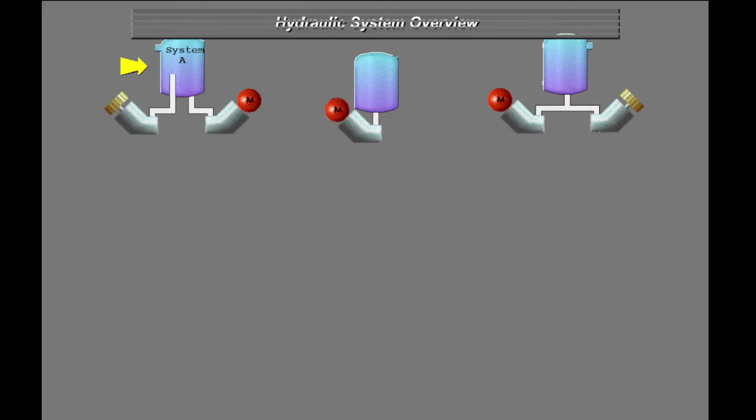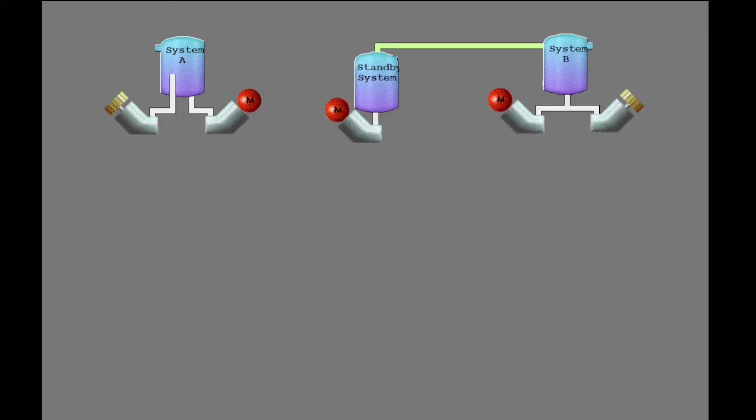The 737 has three hydraulic systems: System A, System B, and the standby system. The hydraulic systems have reservoirs in the main wheel well. System A and System B operate independently.

A hydraulic servicing line connects System B and the standby system. The bleed air system supplies air pressure to Systems A and B reservoirs to make sure there is a positive flow of fluid. System B supplies fluid for the standby system.

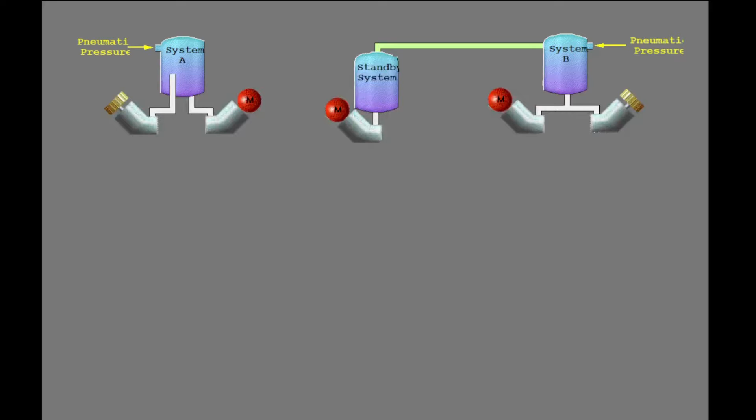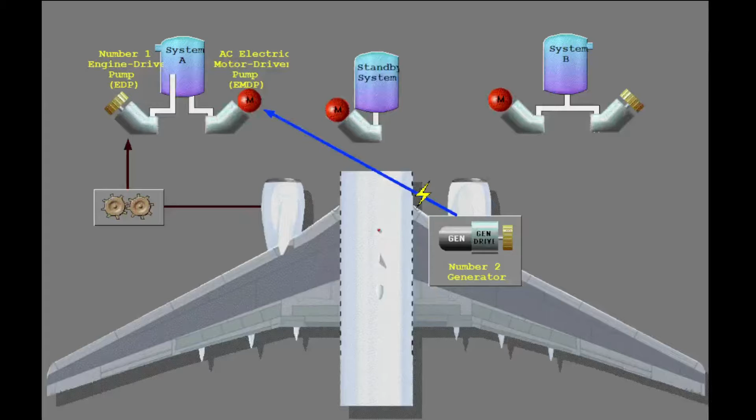The number 1 engine-driven hydraulic pump and an AC electric motor-driven pump supply the pressure for System A. Under normal conditions, the number 2 generator powers the electric motor-driven pump for System A. The number 2 engine-driven hydraulic pump and an AC electric motor-driven pump supply the pressure for System B. Under normal conditions, the number 1 generator powers the electric motor-driven pump for System B. One AC electric motor-driven pump supplies the pressure for the standby system.

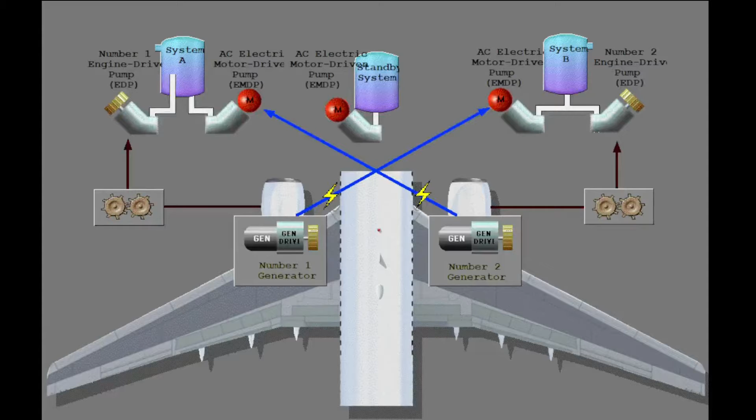System A supplies hydraulic power to these units, and System B supplies hydraulic power to these units. If Systems A and B do not operate, the standby system is available to supply hydraulic pressure to the rudder, the leading edge devices, and the thrust reversers.

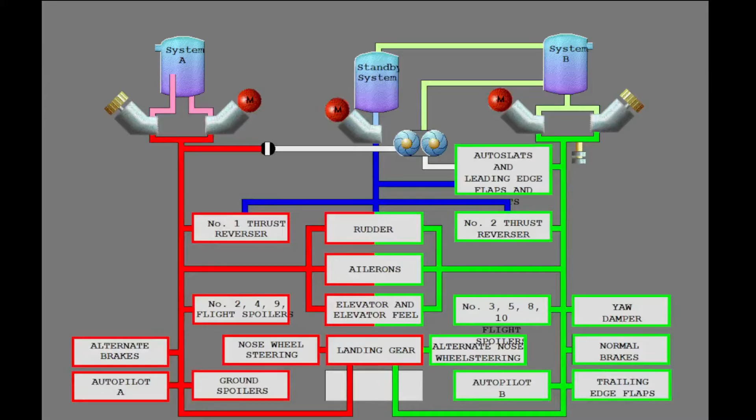The Power Transfer Unit, or PTU, supplies additional volume of hydraulic pressure to operate the auto slats and the leading edge flaps and slats at the normal rate when the pressure of the System B engine-driven pump drops below limits.

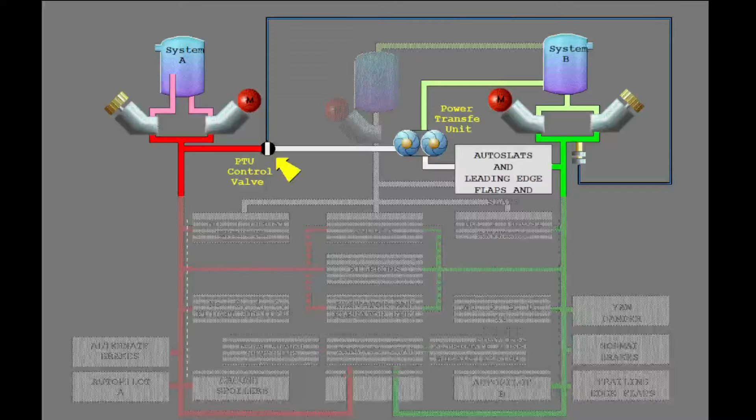The PTU control valve opens when the output pressure from the System B engine-driven pump drops below limits, the airplane is in flight, and the flaps are less than 15 but not up.

When the PTU control valve opens, System A supplies hydraulic pressure to operate the PTU. The PTU uses System B fluid to supply pressure for the auto slat system and the leading edge flaps and slats.

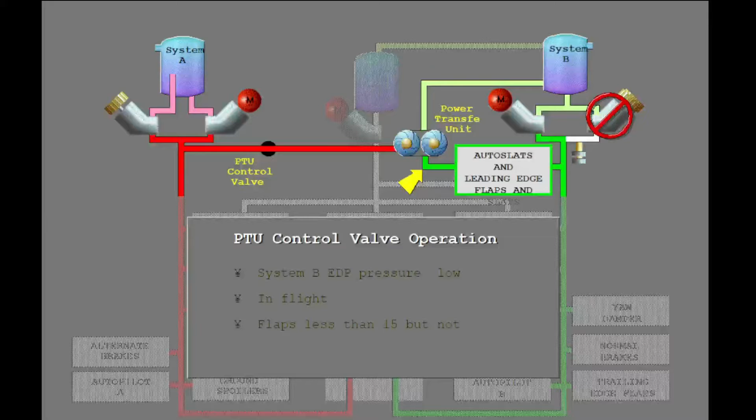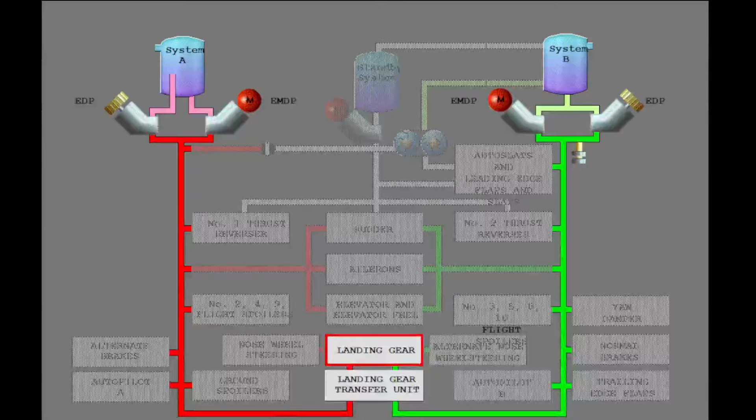If the number 1 engine fails, the landing gear transfer unit supplies hydraulic fluid volume from System B to raise the landing gear.

In System A and System B, the engine-driven pumps supply a larger volume of fluid than the electric motor-driven pumps. If the left engine fails, System A does not supply sufficient hydraulic volume to quickly retract the landing gear. The electric motor-driven pump continues to operate as usual, but the total hydraulic volume of System A is less.

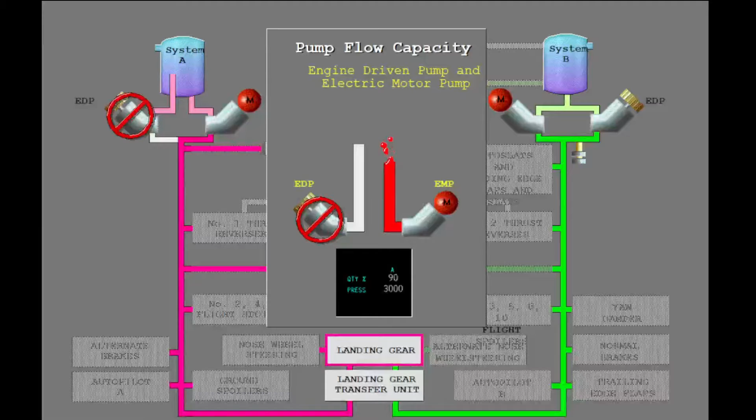The landing gear transfer unit operates when the number 1 engine N2 is less than idle, the landing gear lever is in the up position, and one of the main gear is not in the fully up position.

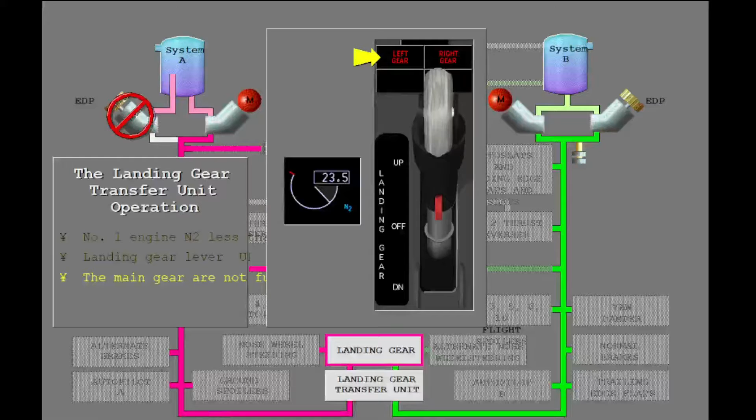The landing gear transfer unit supplies System B hydraulic fluid volume to retract the gear.

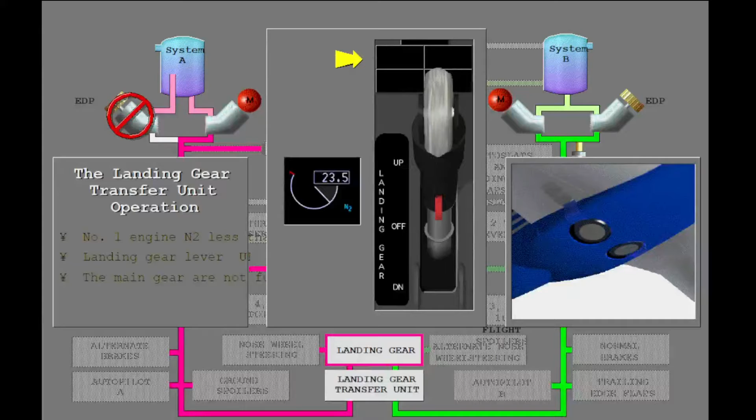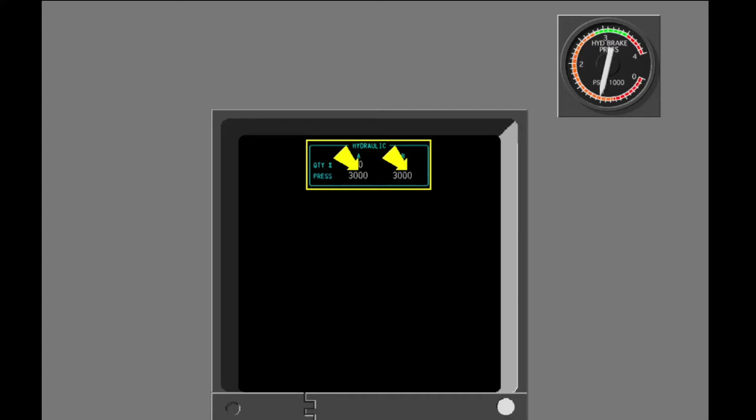The lower display unit shows the pressure of System A and System B. There is no pressure indication for the standby system. The normal pressure for the three systems is 3,000 psi. The lower display unit also shows the quantity of System A and System B hydraulic fluid in percent of full. For example, 90 shows that the reservoir is 90% full.

If the quantity is low and the airplane is on the ground, the system shows the letters RF, or refill, adjacent to the quantity indications.

The hydraulic brake pressure indicator shows the hydraulic brake pressure. The normal brake pressure is 3,000 psi.

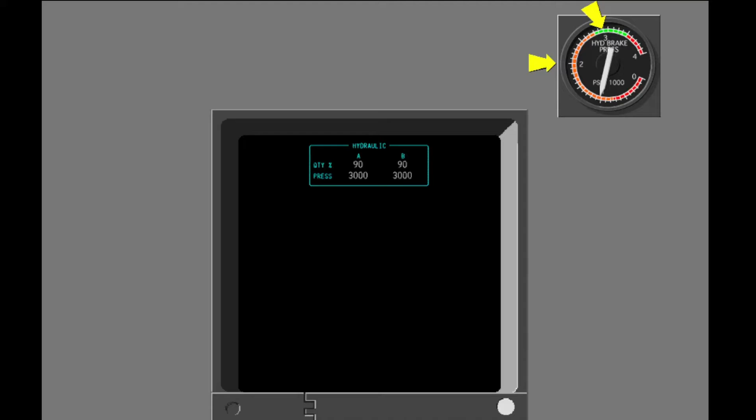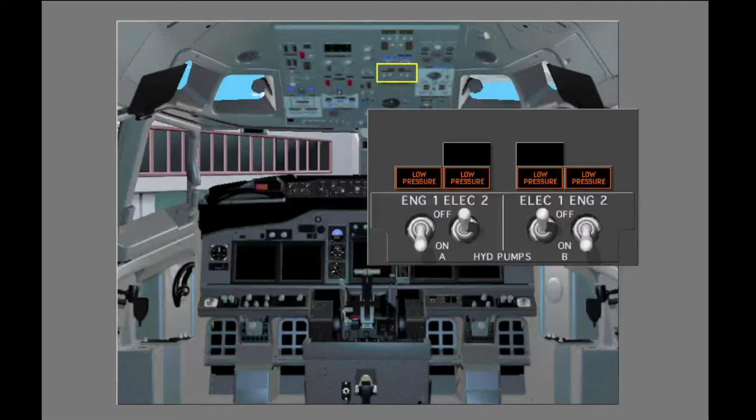The controls for the hydraulic systems are on the forward overhead panel. System A and System B controls are on the hydraulic control panel, and the standby system controls are on the flight control panel.

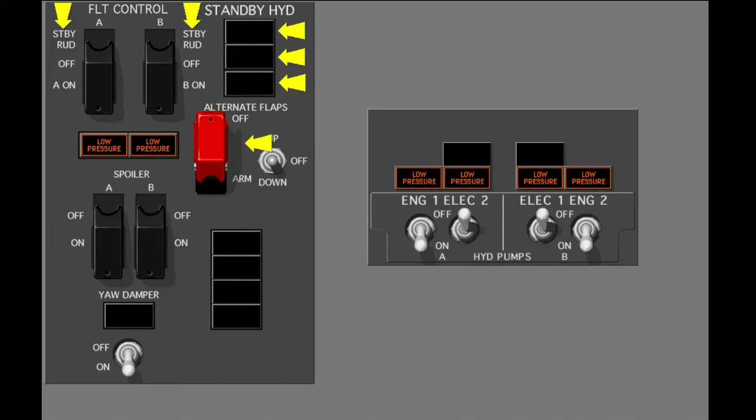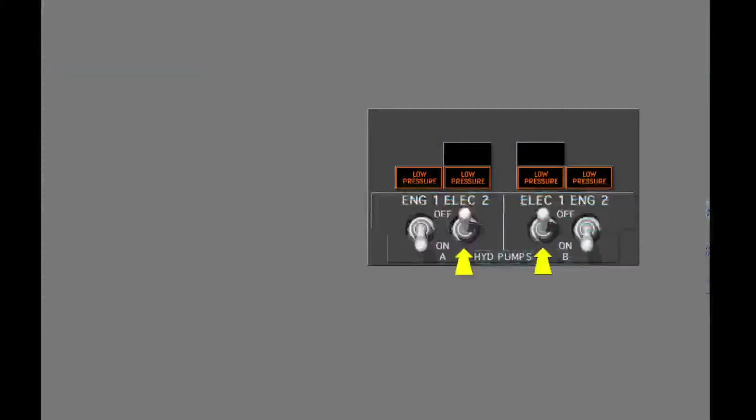Now let's discuss the normal operation of the hydraulic systems A and B. During the safety inspection, you make sure that the electric motor-driven pump switches are off before you turn on any electrical power to the airplane.

The electric motor pump switches control the electric motor-driven pumps in Systems A and B. The engine-driven pump switches control the related engine-driven pumps.

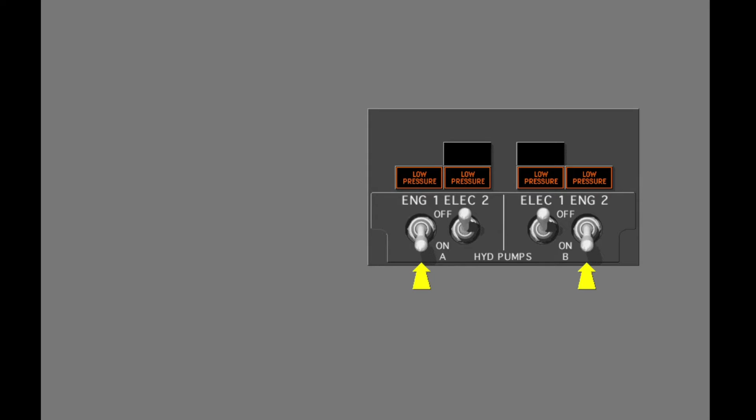Systems A and B lower the temperature of some hydraulic fluid with heat exchangers in the main fuel tanks. Before you operate the hydraulic system on the ground, you must make sure that there is fuel in the main wing tanks.

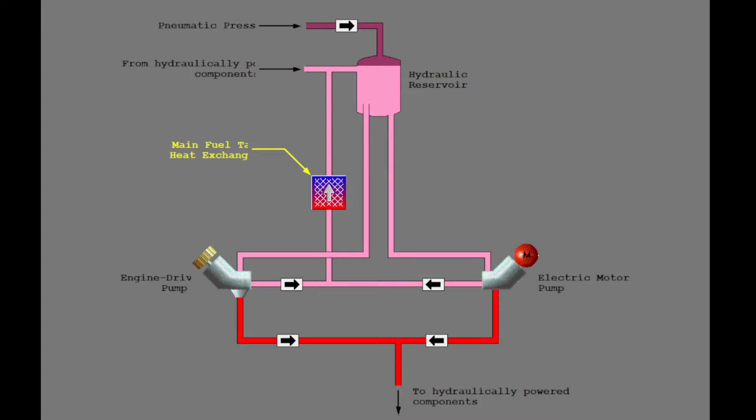The low pressure lights show that the output pressure from the related pump is low. During the pre-flight, you make sure the engine-driven pump switches are on, and you select the electric motor-driven pumps to on. Turn on the electric motor-driven pumps.

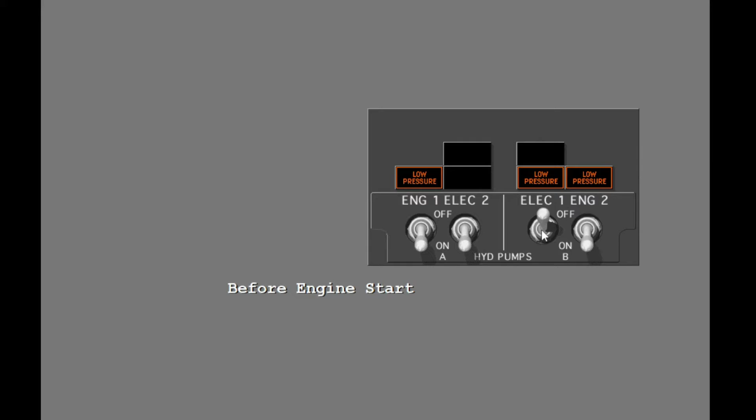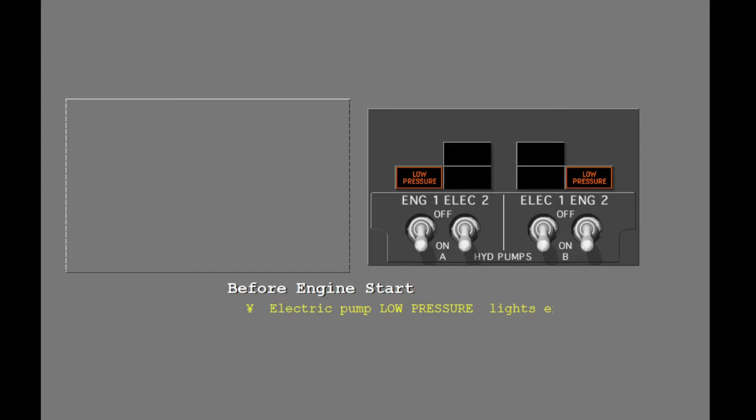After the electric motor-driven pumps are on, make sure the electric motor-driven pump low pressure lights extinguish. The hydraulic pressure increases to normal. The brake pressure indication increases to normal. And the hydraulic quantity indications do not show RF.

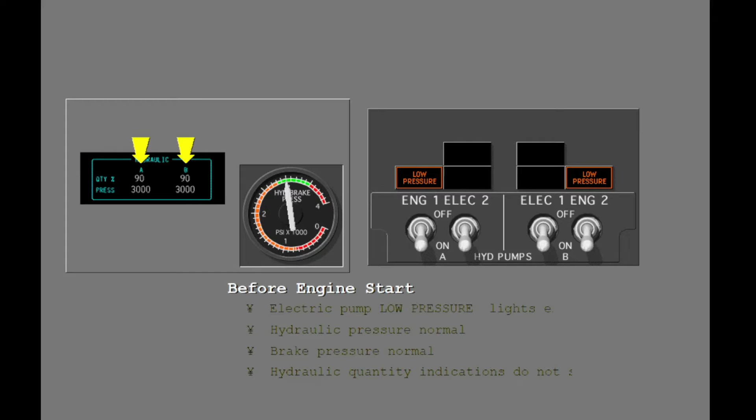During pushback, if the nose gear steering lockout pin is not installed, you must turn off the System A hydraulic pumps.

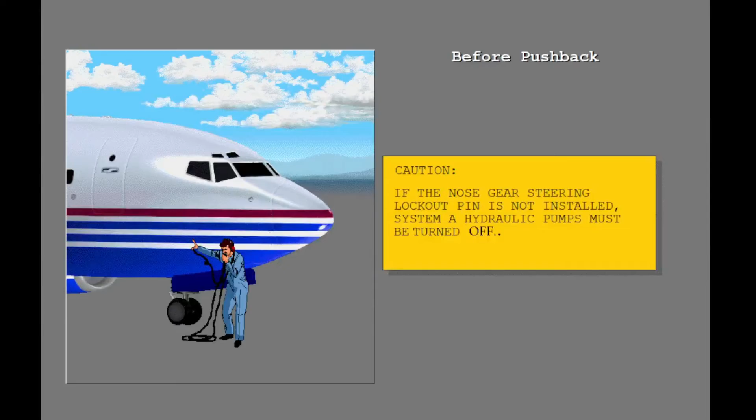The engine-driven pump low pressure lights extinguish when the engines operate and the engine-driven pumps supply pressure. Now turn off the number 1 engine-driven pump.

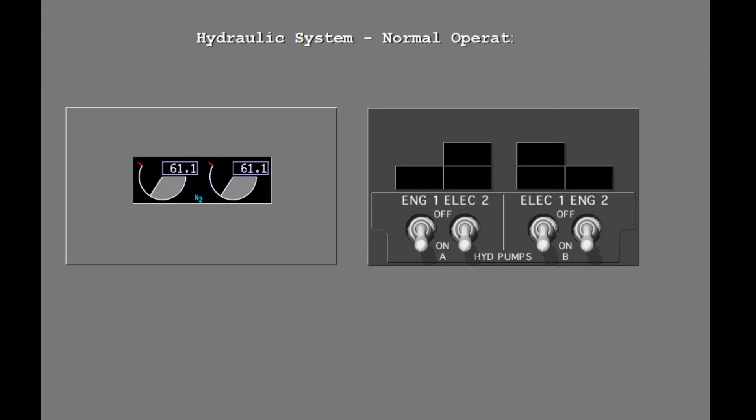When you select off with the engine-driven pump switch, a solenoid closes and holds the blocking valve, and fluid does not go through the related pump. The engine-driven pump continues to operate but does not supply pressure.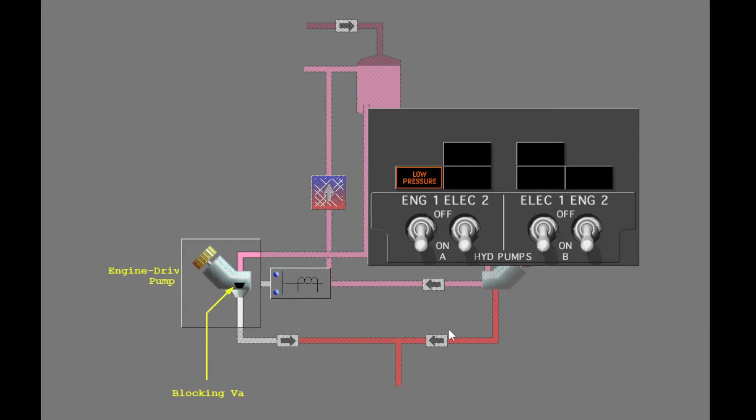During normal operations, the engine-driven pump switches stay in the on position to increase the life of the solenoid. Move the number 1 engine-driven pump switch to on. The hydraulic system is ready for flight.

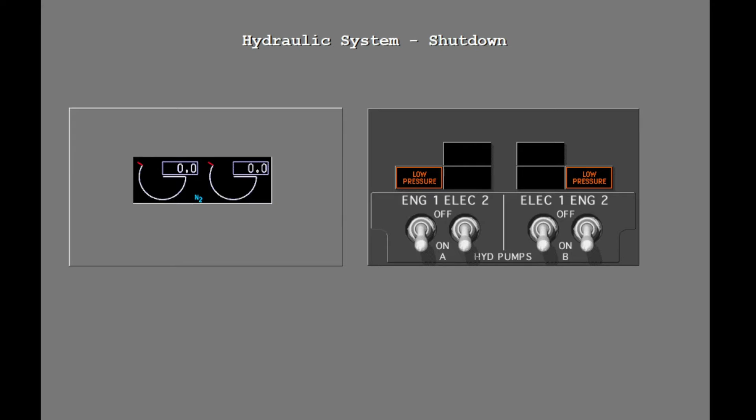To shut down the hydraulic system after taxi-in, turn off the electric hydraulic pumps. The switches for the engine-driven pumps stay in the on position.

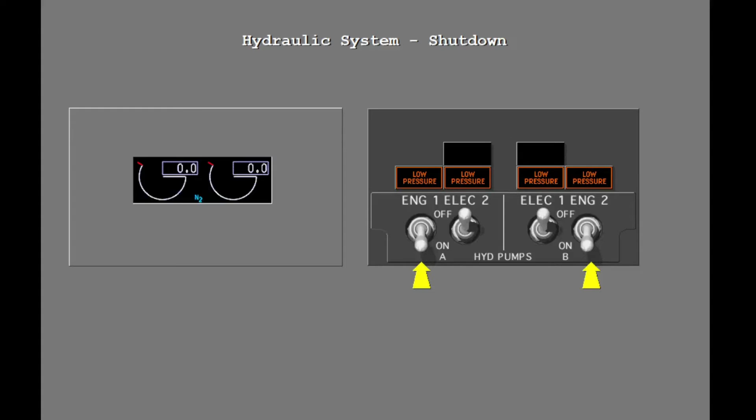To review, touch any control or pressure light. Press the green arrow to continue.

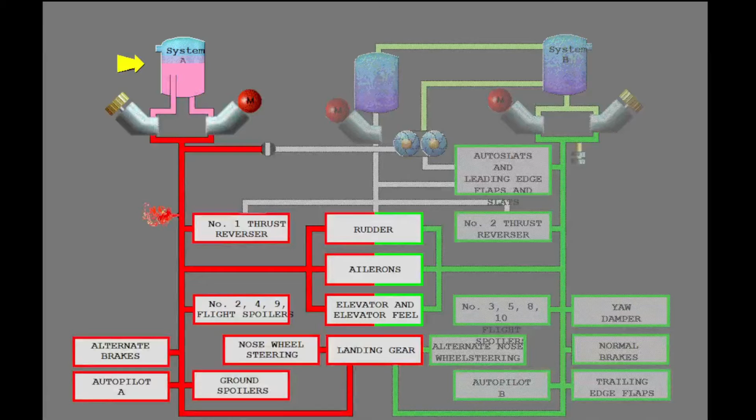During flight, there is a failure in System A and the hydraulic fluid quantity decreases. When the quantity decreases to less than limits, the master caution lights illuminate and the flight control and hydraulic annunciator lights illuminate.

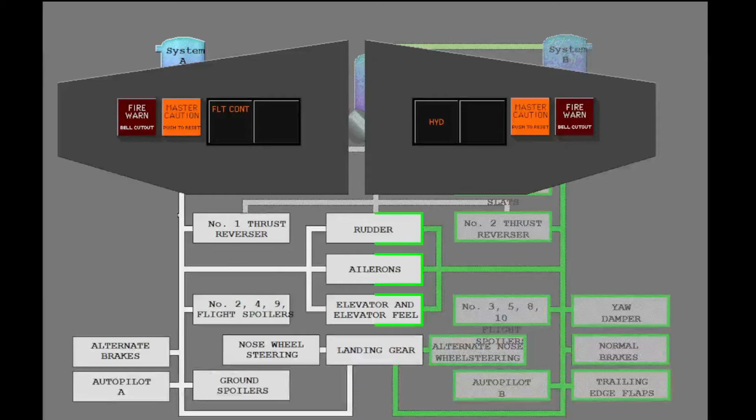On the overhead panel, the low pressure lights for the System A pumps illuminate. Turn off the System A hydraulic pumps. The System A flight control low pressure light illuminates because System A pressure to the flight controls is low. Select Standby Rudder with the System A flight controls switch to activate the standby hydraulic system.

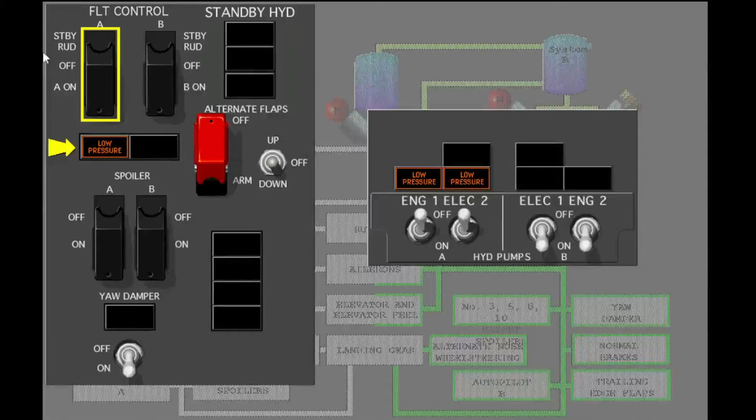Also, the feel differential pressure light illuminates. These lights are discussed in a different lesson. The System A pressure and the quantity indications are low.

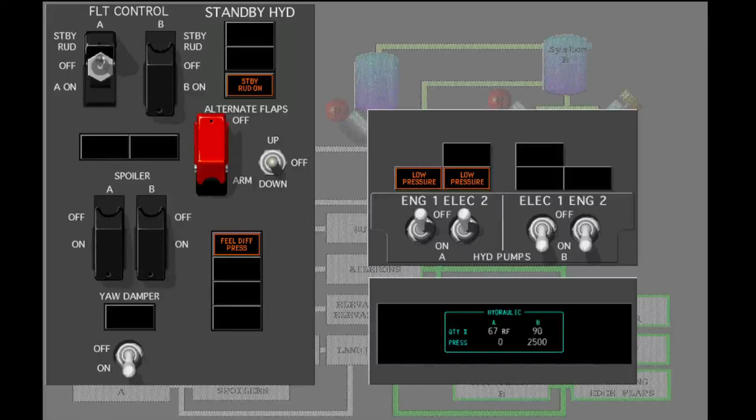When System A does not operate, these components do not operate. The rudder, the ailerons, the elevator, and the elevator feel continue to operate because System B supplies hydraulic pressure to these units. Half of the flight spoilers do not operate. System B supplies pressure to the remaining flight spoilers.

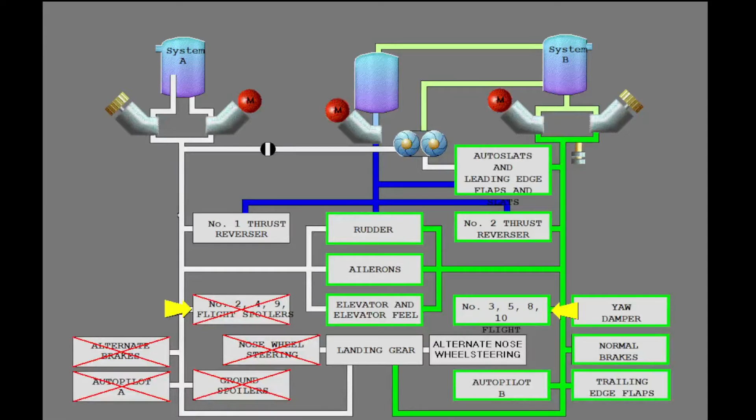To lower the landing gear, you must use the manual gear extension handles. To supply hydraulic pressure for nose gear steering, you must select alternate with the nose wheel steering switch.

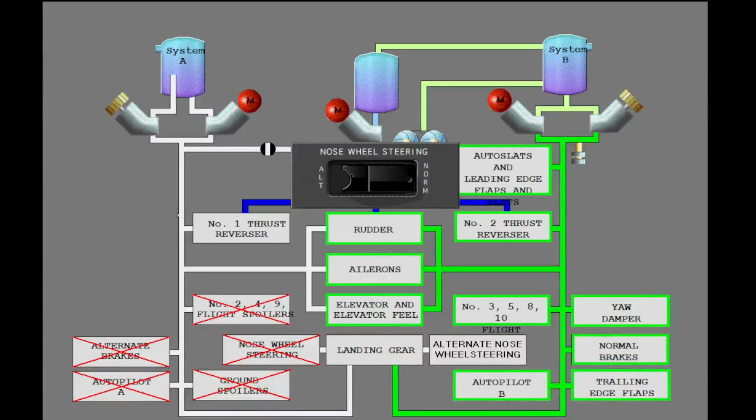System B now supplies hydraulic pressure for nose wheel steering when the airplane is on the ground. When System A pressure is low, the hydraulic pressure from the standby system is available to operate the number 1 engine thrust reverser. The standby system is discussed in a different lesson.

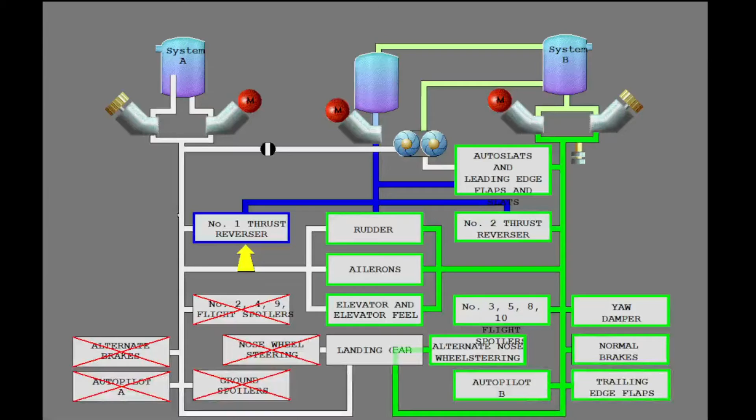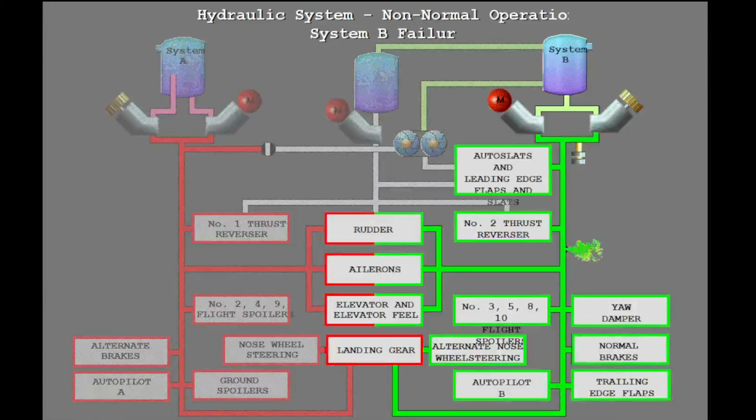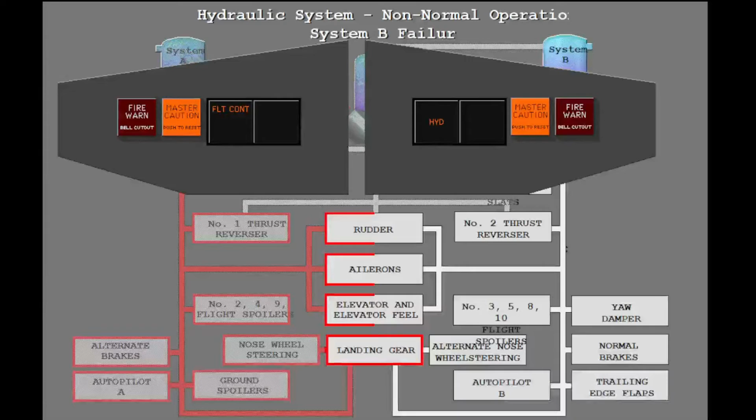During flight, there is a failure in System B and the hydraulic fluid quantity decreases. When the quantity decreases below limits, the master caution lights illuminate and the flight control and hydraulic annunciator lights illuminate. Reset the master caution system.

On the overhead panel, the System B flight control low pressure light illuminates. The feel differential pressure light illuminates. The System B low pressure lights illuminate, and the System B pressure and quantity are low. Now, turn off the System B hydraulic pumps and select Standby Rudder with the System B flight controls switch.

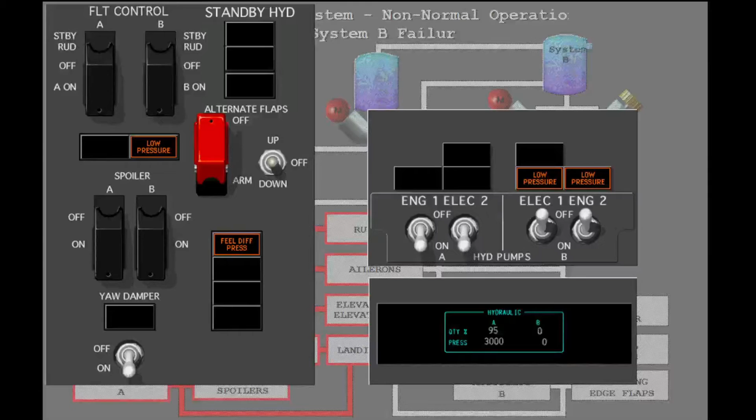When there is a failure of System B, these systems do not operate. The rudder, ailerons, elevator, and elevator feel continue to operate because System A supplies pressure to these units.

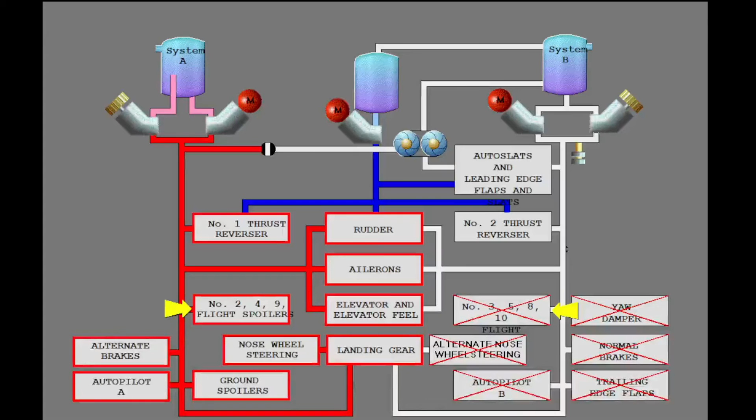Half of the flight spoilers do not operate. System A supplies hydraulic pressure to the remaining units. The yaw damper does not operate. Although the normal brakes do not operate, System A supplies pressure for the alternate brakes.

When System B pressure is low, the standby system is available to supply hydraulic pressure to the leading edge devices and the number 2 engine thrust reverser.

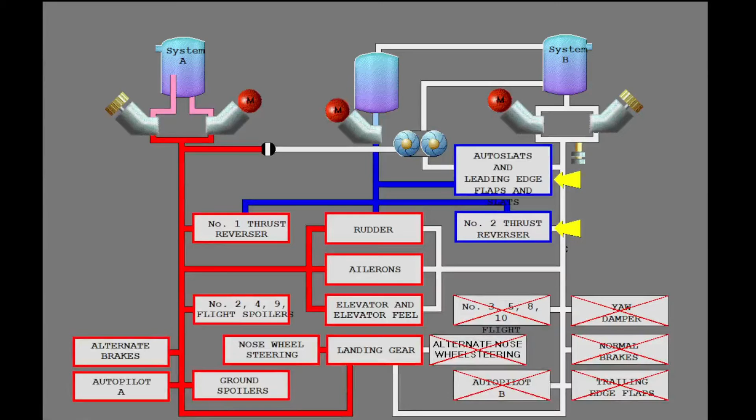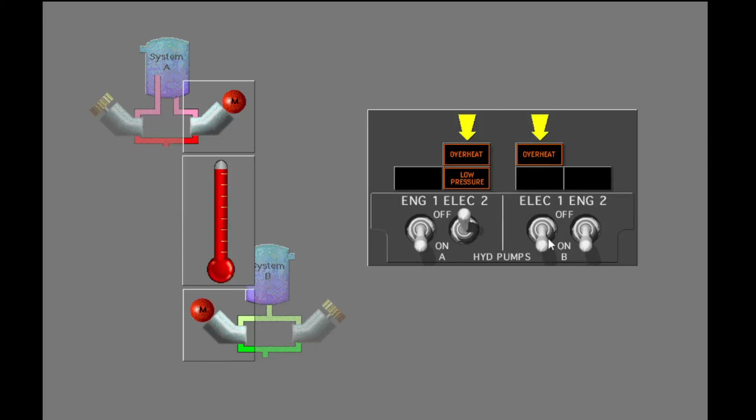If the temperature of the electric motor-driven pumps or the related hydraulic fluid is higher than limits, the related overheat light illuminates. Turn off the electric motor-driven hydraulic pumps. The related hydraulic system continues to operate with pressure from the related engine-driven pump.

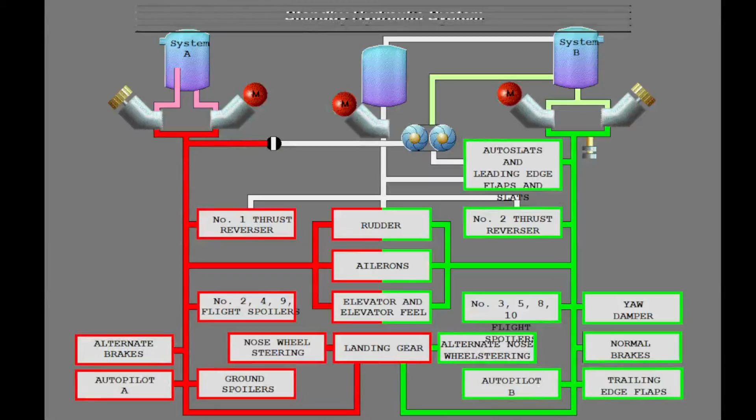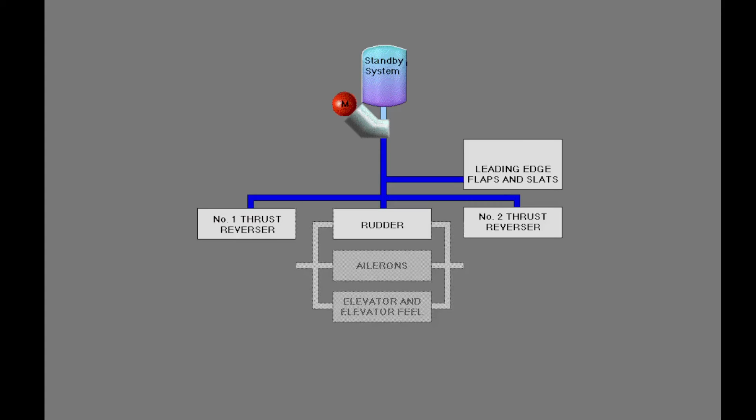The standby system is available if there is a loss of normal hydraulic pressure. To manually turn on the standby hydraulic system, you use one of the flight control switches, or you use the alternate flaps switch.

With the System A flight control switch or the System B flight control switch, you control the standby hydraulic pressure that goes to the rudder. Select Standby Rudder with the System A flight control switch.

When you select Standby Rudder, the standby pump operates. To verify the pump operates, the low pressure light illuminates for approximately 1 second. Also, the standby rudder shutoff valve opens,

the related flight control shutoff valve closes, and the related low pressure light extinguishes. Additionally, the standby rudder on light illuminates anytime the standby rudder hydraulic system is pressurized.

Now select Standby Rudder with the System B flight control switch and look at the indications. Now close the guards for both flight control switches. Now select Arm with the alternate flaps switch.

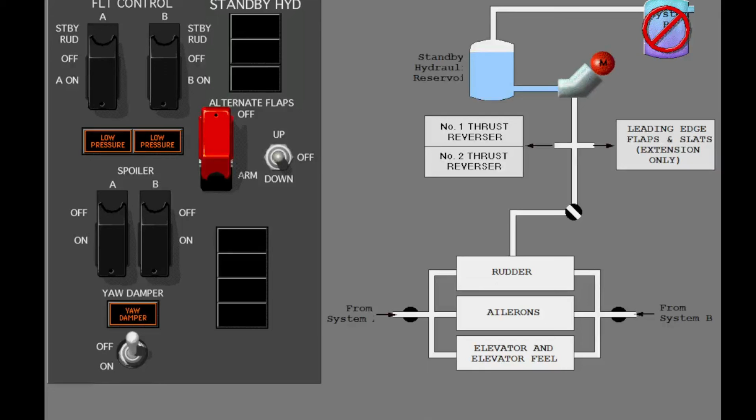The alternate flaps switch turns on the electric pump in the standby system. The standby hydraulic system is now available to extend the leading edge flaps and slats. Standby hydraulic pressure is also available to operate the thrust reversers.

Note that in this case, the standby rudder on light does not illuminate because the standby rudder system is not pressurized. Now turn off the alternate flaps.

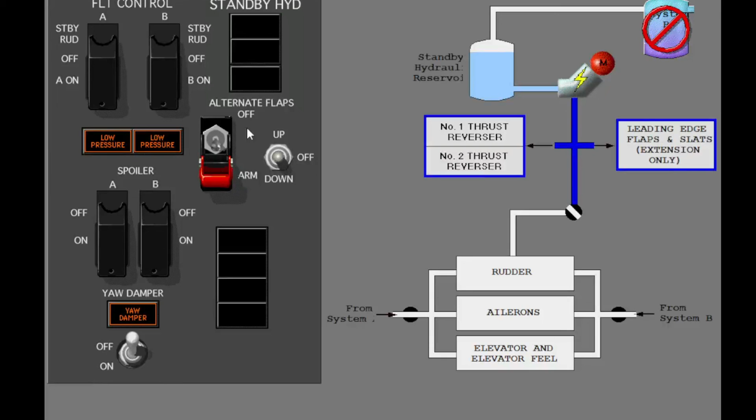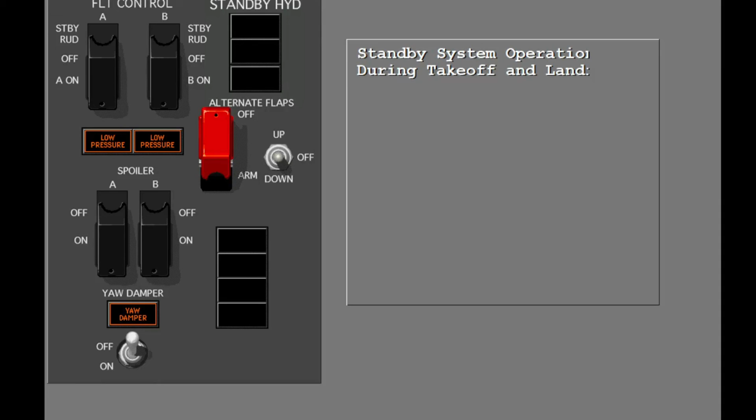During takeoff and landing, the standby hydraulic system can operate to supply hydraulic pressure to the rudder without flight crew action. The standby pump operates and the standby rudder shutoff valve opens when the pressure in System A or System B is low and the flaps are not up, and the airplane is airborne or the wheel speed is greater than 60 knots.

When these three conditions are true, the standby system supplies hydraulic pressure to the rudder. Flight crew action is not necessary. The standby system operates until the flaps are fully up.

The low quantity light illuminates if the quantity in the standby system is low. The light is always armed. If System A and System B do not operate and the standby system low quantity light illuminates, the rudder, the thrust reversers, and the leading edge devices do not operate. The low pressure light for the standby system shows the output pressure from the standby pump is low.